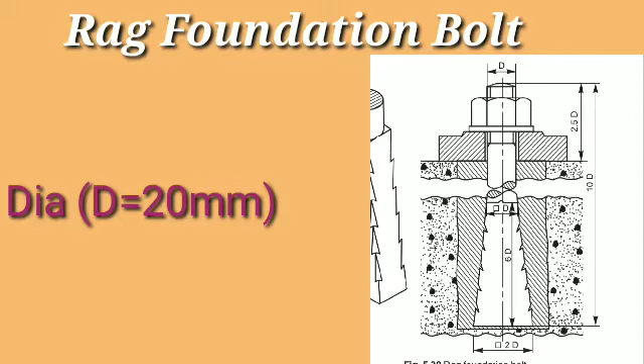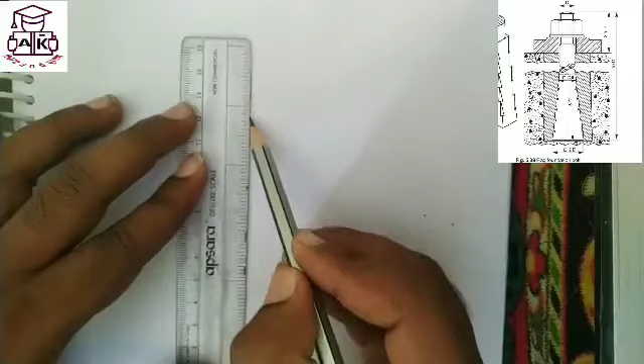Rag foundation bolt. So this is the actual diagram of the Rag foundation bolt. The diameter is equal to 20 mm. So please see the procedure for how to draw the Rag foundation bolt. So draw the center axis of the bolt.

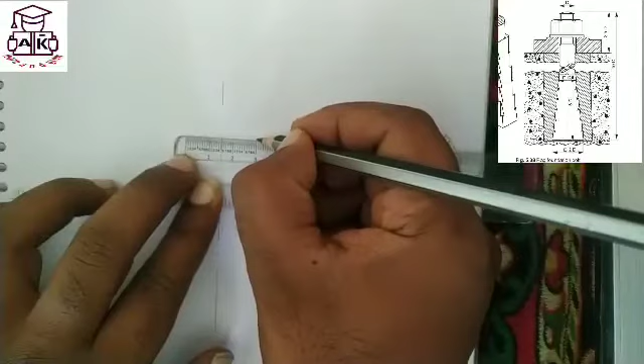So in this procedure, first of all you complete the nut portion. After completion of the nut portion, draw the bolt portion. So take the D dimension. D equal to 20 mm for the nut.

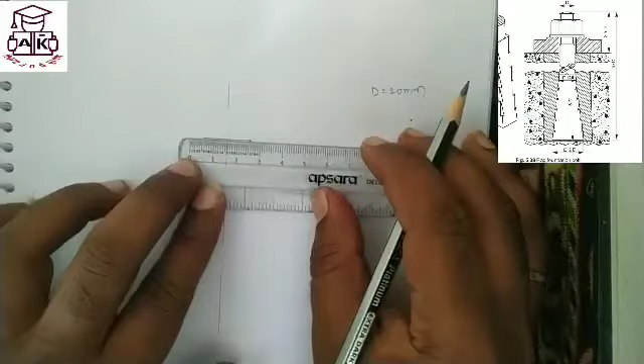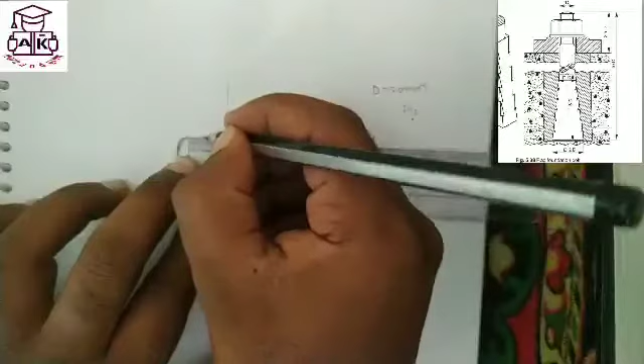The bolt diameter equals 20 mm. So this is D by 2. So draw the D by 2 dimension. That means 20 by 2 equals 10. So again draw the D by 2 dimension on the right side of the center axis.

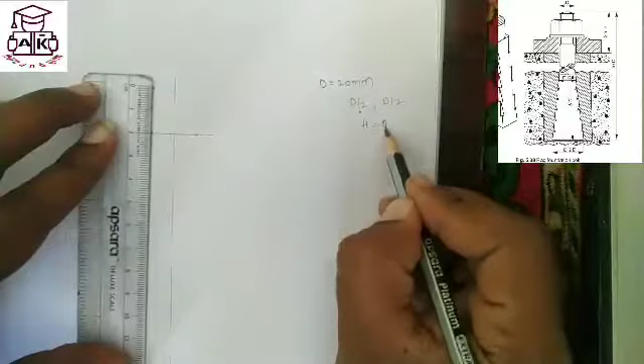So draw the height of the nut. The height of the nut equals D. The symbol for height of nut is H. So take the D dimension. We know that D equals 20 mm. So draw vertical lines.

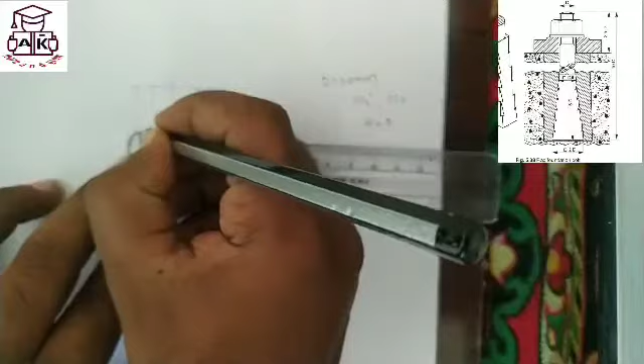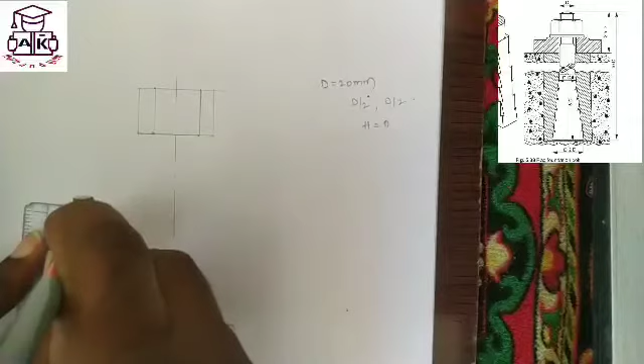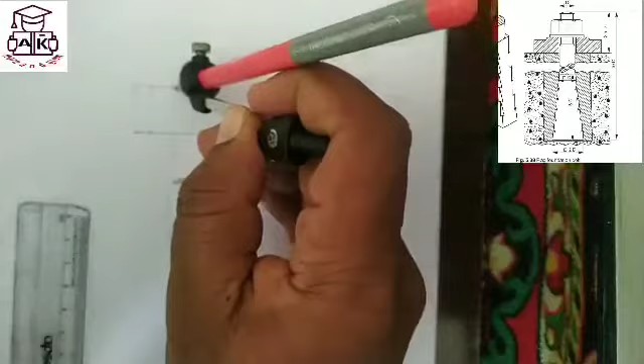So take 2D radius and draw the arc like this. This is the position of the compass; draw the arc.

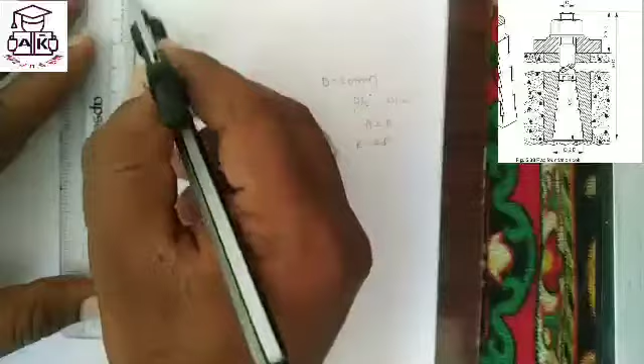So this is the height of nut, H equal to D. This is D by 2, this one is D by 2, and the middle portion is D.

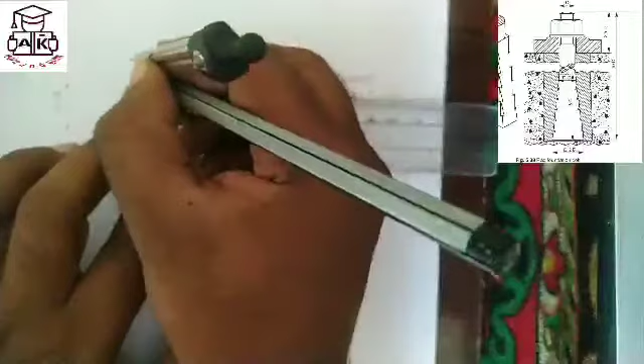So draw the remaining arcs also. Use the line bisecting method and complete these two arcs. You already know the procedure for drawing the arcs; in previous videos I explained how to draw the arcs of the nut and bolt.

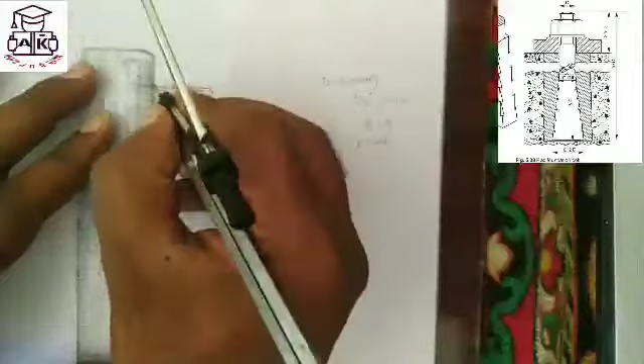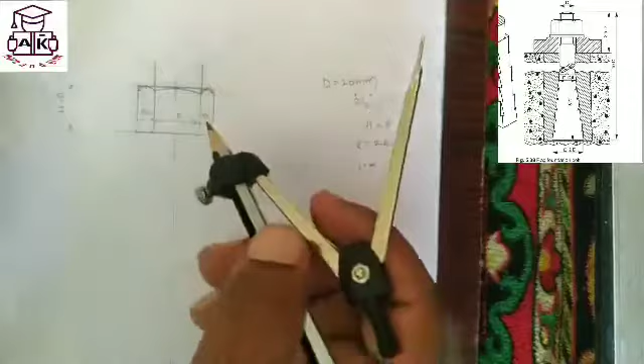So draw one vertical line. The height of that line is 0.5 into d. The height of this line is 0.5 into d. Then the dimension between these two lines is 20 mm, the diameter. So see the actual diagram on screen.

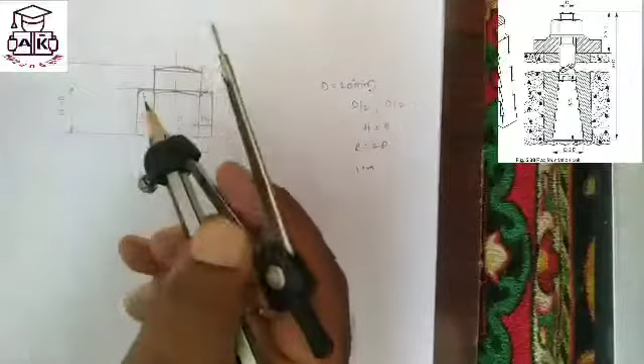So how to start the diagram? That is also very important in machine drawing. Take 2d radius and draw this arc. This is 0.5 into d. We know that d equals 20 mm, so substitute in the 0.5 into d formula and calculate the values.

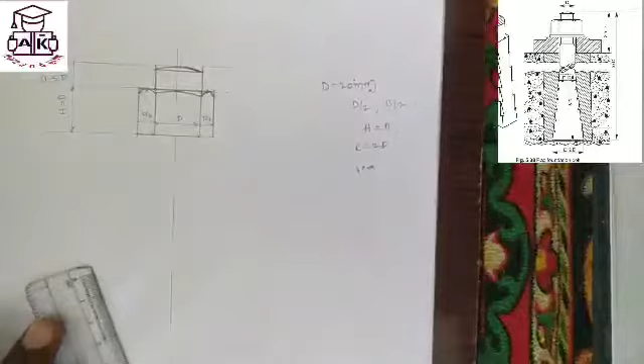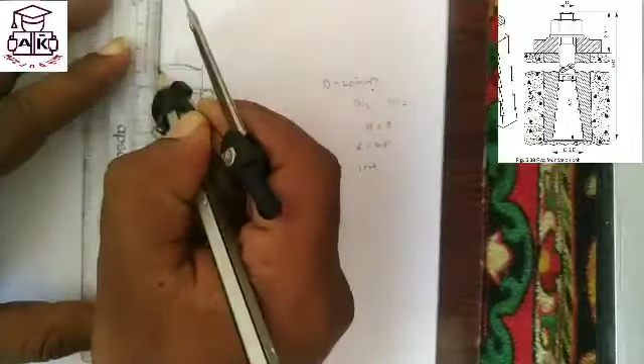That is the formula for core diameter, 0.8 into d. So draw the inner diameter, that means the core diameter, also. So these are the core diameter lines.

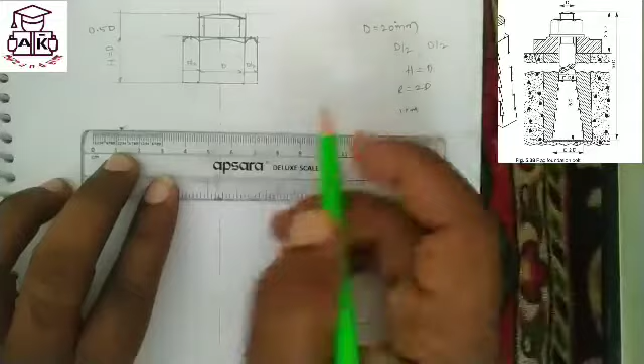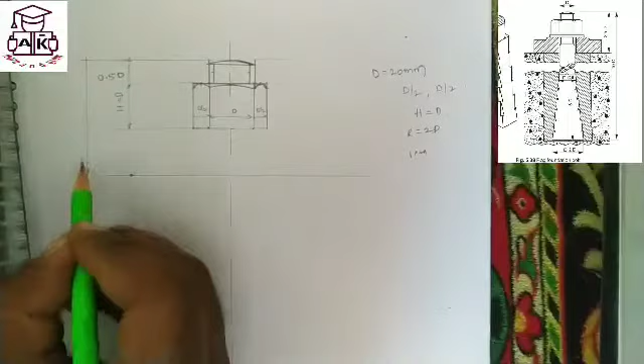So from here to here, take 2.5 into d distance and mark one point. Draw the horizontal line. From here to here is 2.5 into d. The dimension is 2.5 into d.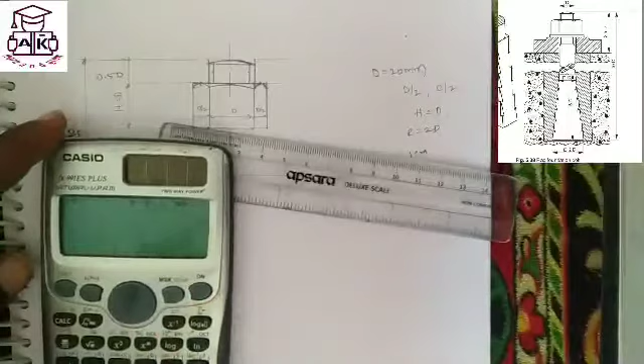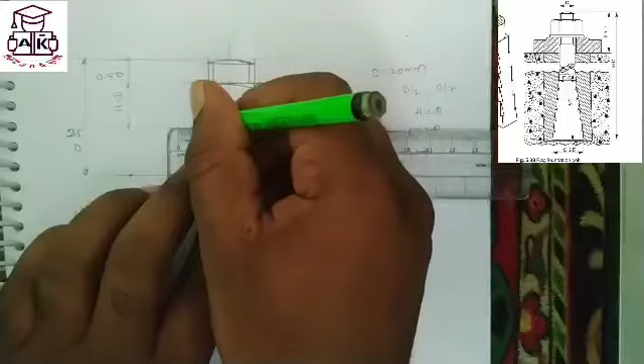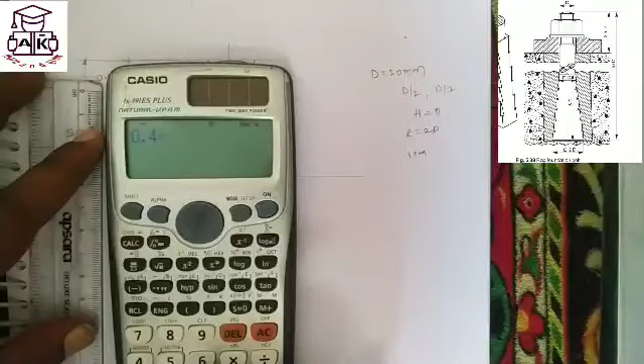So draw the washer also. Width of washer: take 2d plus 4. 2d plus 4 means 2 into 20 is 40, 40 plus 4 is 44. So take 22 mm on the right side of the center axis, and again 22 mm on the left side of the center axis.

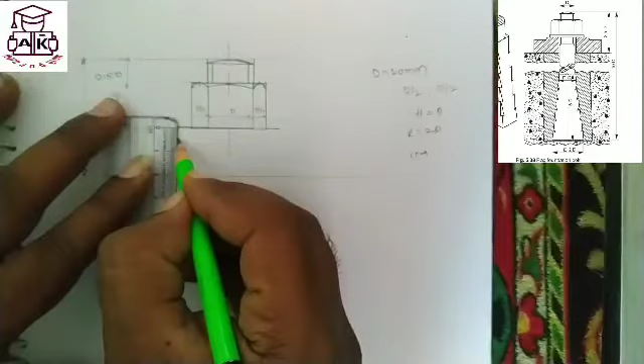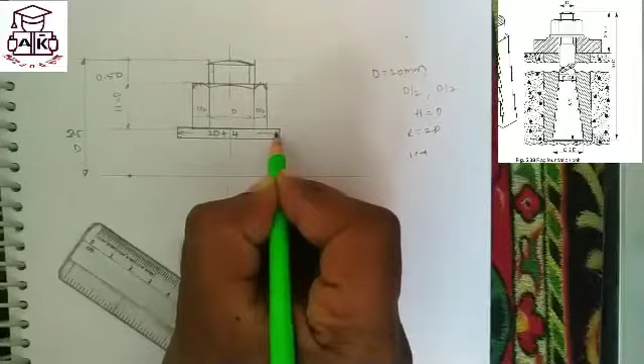This is the thickness of the washer, 0.4 into d, and draw the washer portion. 2D plus 4 mm.

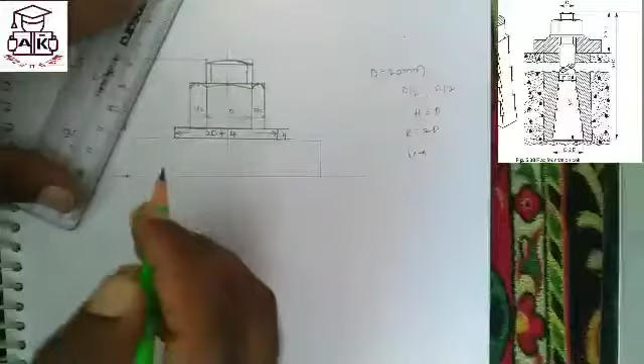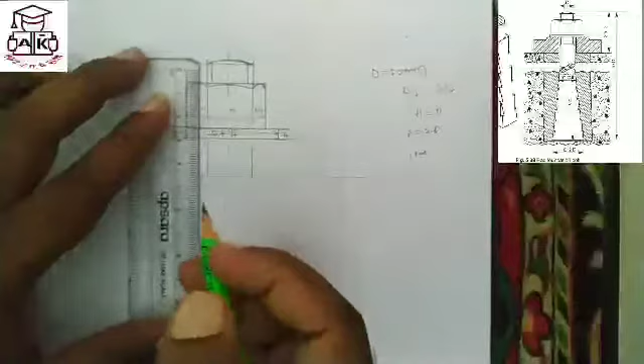So project this portion from top to bottom like this. The dimension between these two lines is D. D equals 20 mm. So take a 2 mm gap and draw this line and this line.

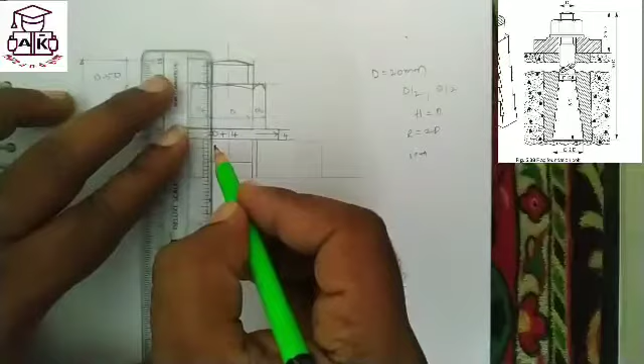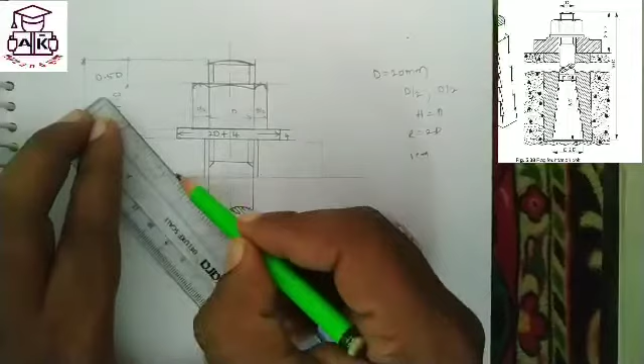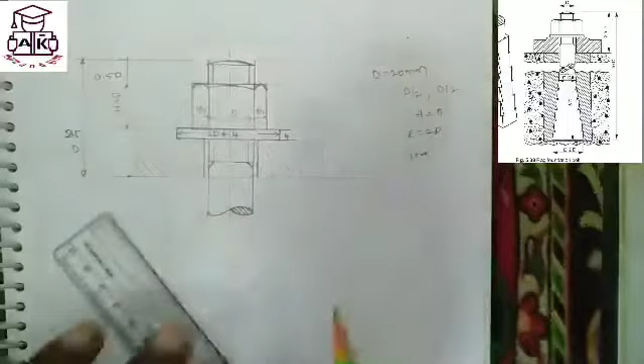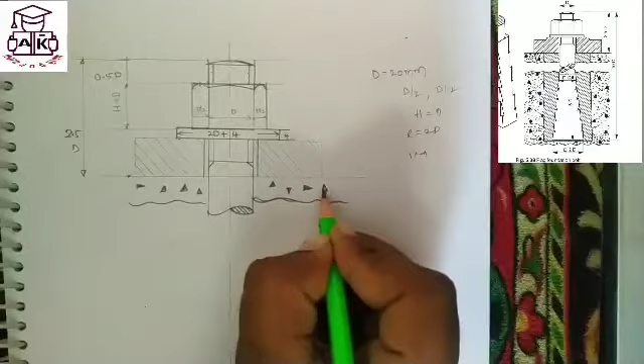So draw the core diameter lines also. Portion also.

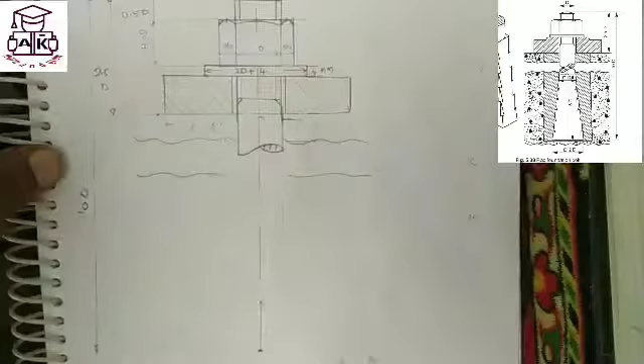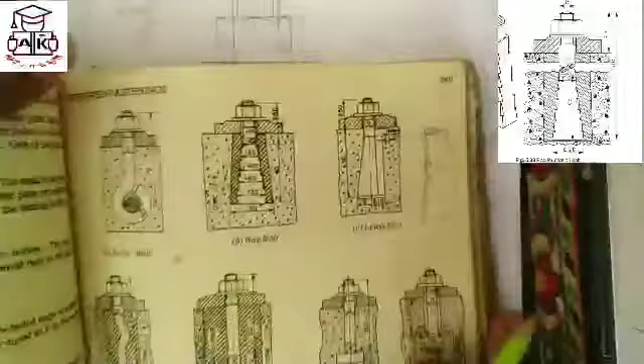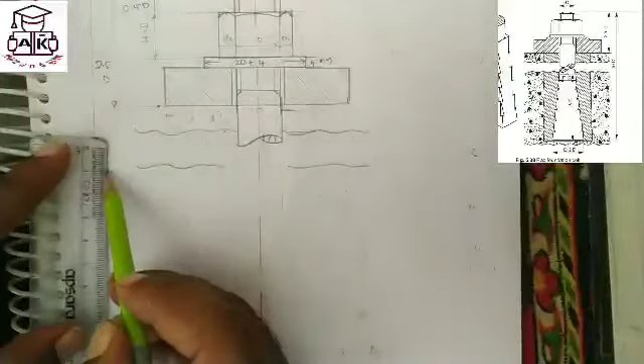So take from that point to this point 10 into D dimension. This is the rag bolt. This is the complete height, 10D. From that point to this point is 6 into D. So take 6 into D. We know that D equals 20 mm, so 6 into 20 equals 120 mm.

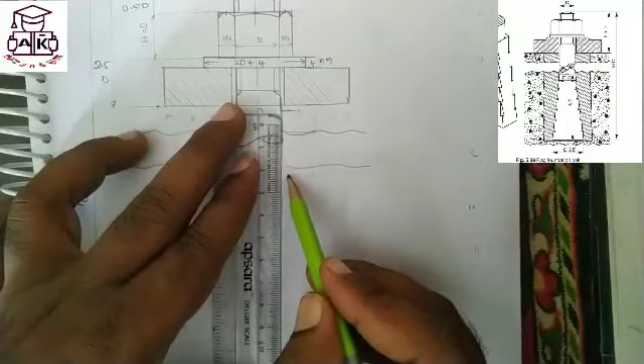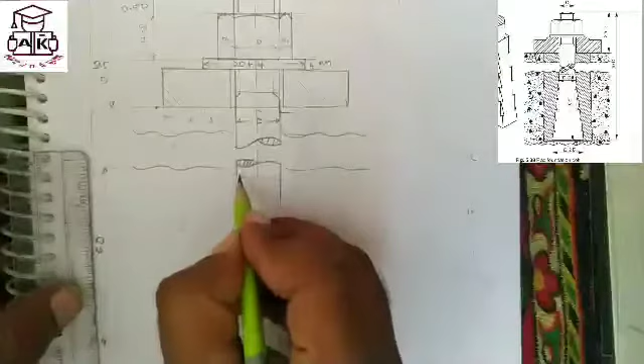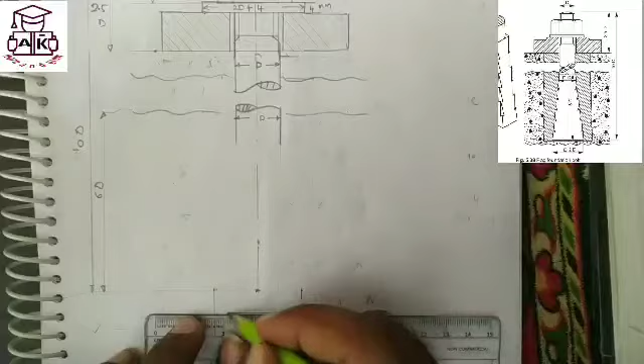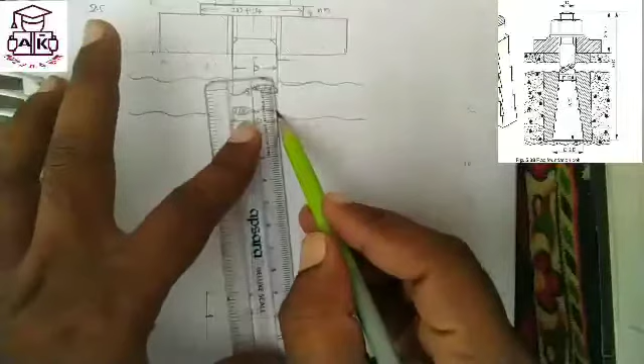So this is dimension D. Please take 2D diameter. D equals 20 mm, so 2 into 20 equals 40. Take 20 mm on the left side of the center axis and again 20 mm on the right side of the center axis. Draw like this, and join from that point to this point.

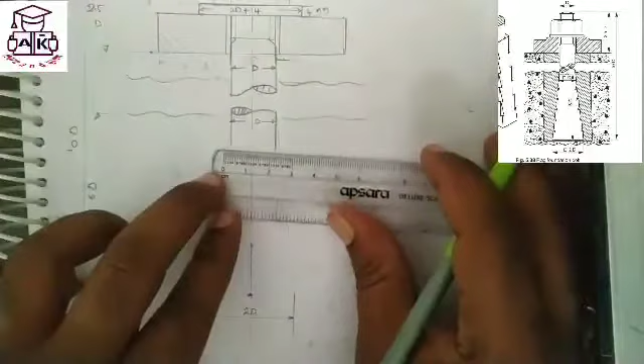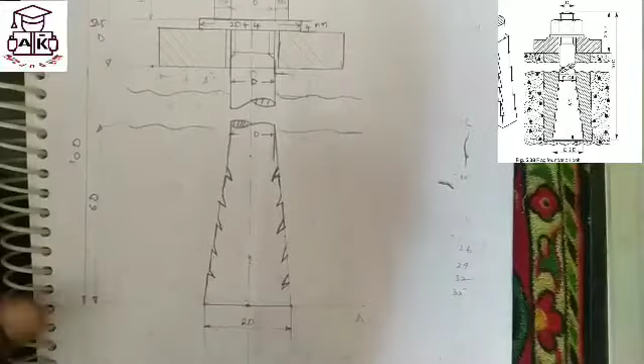So after completion of this one, draw like this.

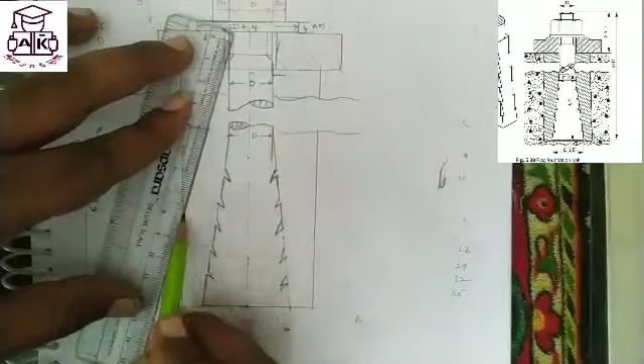So draw a vertical line. Hatching is required for that portion, so draw the hatching lines. We know that hatching lines use 45 degrees. Don't use a scale; use only the drafter.